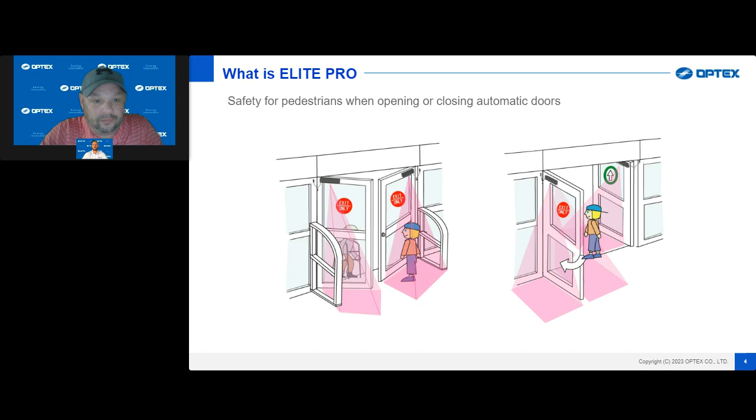The main components of our new Elite Pro series. We're going to do a little comparison here from our old Elite T series that had the door loop, which was our problem child, to say the least. We've listened and we took out the door loop. Now, just to emphasize, there is still a power transfer cable, so it's not wireless, but we have eliminated the position sensor, or what we call the door loop.

Before, in the old Elite T, you had two controllers. If you had a dual door system, single control for a single door system. With the new Elite Pro, there's only going to be one controller that can do the dual doors or single doors or even the LE, low energy models. Again, we have eliminated the door loop, but there is still a power transfer wire that will need to be put in place.

The position sensor, or the old door loop on the Elite T - the new system has a built-in position sensor in the sensor head itself, so that's how we can learn the positions of the doors. As you can see on the diagrams here, I have some red boxes put up, that's just explaining the old door loop. The 2 controls for a dual door system, all down to 1 control with the new 907 box.

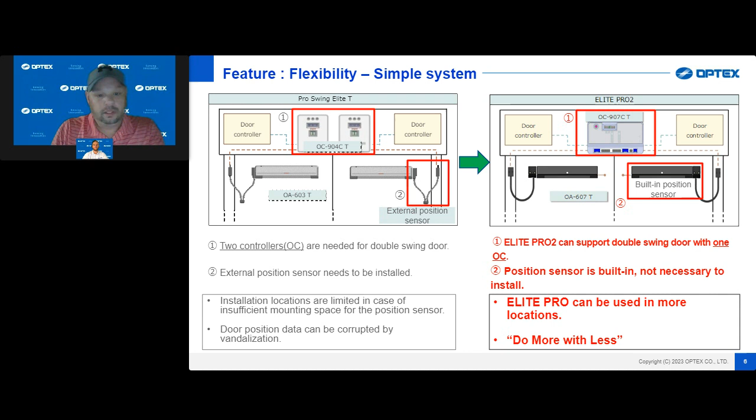Going on, the main components of the Elite Pro: we have our 1 control for the doors, it's the 907 CT, and our sensor heads are now the OA607s. The 907 can control up to 4 sensor heads, so you can do a dual door with 1 control. This helps out with less wiring, less everything. It's a lot more tech friendly than our past sensors.

We support all kinds of doors, and our new sensor heads - one of the best things I like is if you have to switch out from an Elite T to an Elite Pro, the mounting patterns and stuff for the new Elite Pro is the same as the Elite T. So there's no new holes to drill, no new anything really. Everything will actually mount up right with any existing Elite T system if you have to replace them.

The concept, this started years and years ago. People, the market was asking for the best swing door system. And in my opinion, OPTEX has now given them the best swing door system at the best cost.

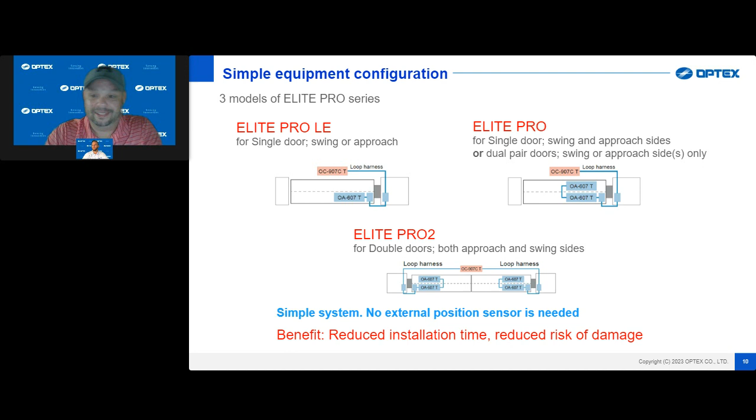The auto configuration. Installation on the old Pro Swing Elite T, you had the installation wiring, you had the setting by dip switches, you had to change a whole bunch of dip switches, you had to pick the side of the door, you had to choose the handing of the door, all via dip switches.

On our new Elite Pro series, it does all that for you. It's very technician friendly. It'll learn what handing the door is. It'll learn what side the sensor is on. So all you have to do is, once everything's wired up and ready to learn, hit the function switch, wait till the LED blinks yellow, step back and let it do its thing. So it's literally a one button setup.

If there are errors or anything, then you can always go through and deal with the Wi-Fi, which we'll cover here in just a few minutes.

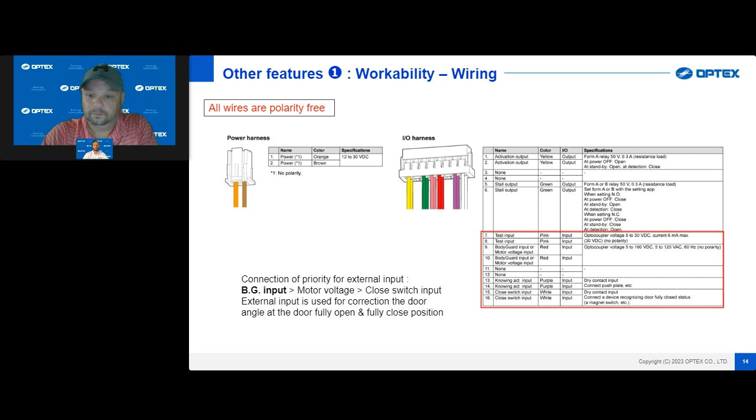I'm going to turn it over here to Tyler at this time, and he's going to actually go over the Wi-Fi and stuff like that. So, Tyler. Thank you, John.

All right, so on the new Elite Pro, this is, I think, one of the most new innovative aspects of this new sensor system. The controller is capable of creating a Wi-Fi signal, and it's not Wi-Fi like you would think of at your house where it's broadcasting internet. It more works like a local network. So you turn on the Wi-Fi on the 907 controller.

With any smart device, whether it's an iPhone, an Android, a tablet, you would open up your settings and you actually go into your Wi-Fi settings and find the Elite Pro controller. It pops up Elite Pro with the serial number. Once you do that, you log into it. They are password protected, so there's a default password, 8 digits to get logged on. Once you do get logged in, it asks you to change the password, so you have a specific password.

We've all seen facilities guys or maintenance guys who get brave and decide that they're going to work on the automatic doors, and usually they do more harm than good. So we went ahead and password protected all the fine-tune adjustments for the Elite Pro. We've been getting a lot of questions about if you came up on an Elite Pro system but didn't set the password, so how do you get in? There is a back door. There's a little process. You push and hold the button and do a couple things, which we can describe in detail, to reset the password back to default. So if you're a tech, you're going to know what that default password is, and you'd be able to get into it and then make your own password.

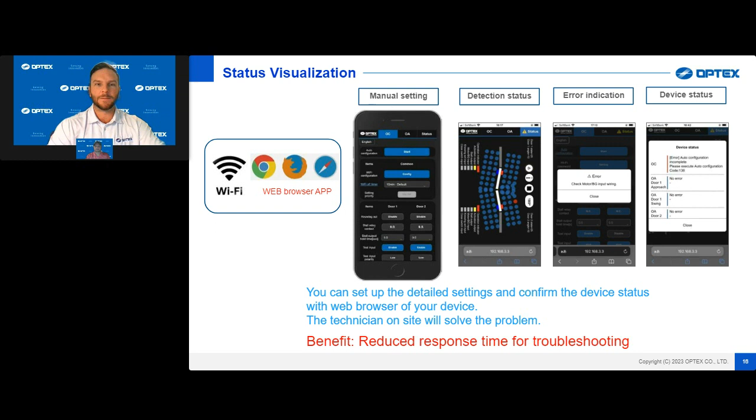Just a couple weeks ago I did operating room pair doors with the small panel, the offset pair - the small panel was like 24 inches or so, and the larger panel was about 48. I put these on and they learned first time, no issues. I had to shrink the zone a little bit on the short panel because it is so small, but the sensors learn all of this while they go through their setup.

You don't flip dip switches. You don't tell it that it's a right-hand approach or a left-hand swing. You put the sensors up and they figure it out by themselves. So there's no handing - if you carry 2 of these around on your truck, you can use them for a left, a right, an approach, a swing. It doesn't matter to the Elite Pro system.

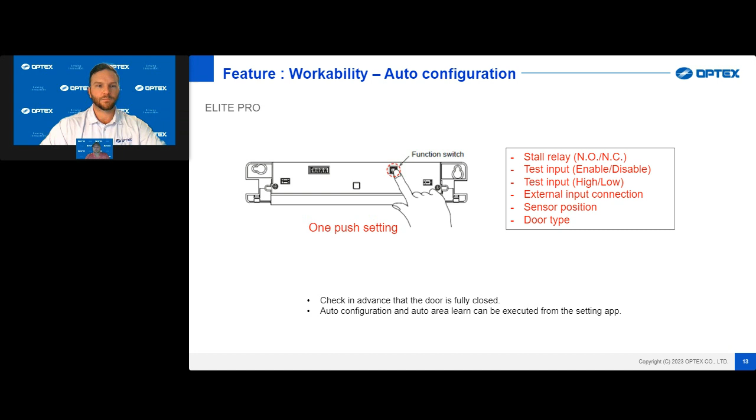We also created a new manual from the previous Pro Swing Elite T. This manual is a really nice book. It's labeled really clearly, not all folded up small in a box with small letters. It's easy to find what you're looking for, everything is split up, and there's plenty of pictures so you know what to do and where. We're proud of this manual, especially since it's a big upgrade from the previous one.

While we're talking about that, say you're in the manual but you can't find what you're looking for, or it's just not making sense to you. One thing we pride ourselves on here at OPTEX is our tech support. John is one of our tech support reps, and our other is Perry Watkins. If you go to our website and look at our sales map, you will find John and Perry's cell phone numbers. They may not appreciate that all the time, but if you've ever been in the field as a door guy with a store manager looking at you, trying to figure out how to get the door back up and running, you understand why that matters.

So we do not have an 800 number to call. You're never going to call OPTEX and get a message like leave us a voicemail and we'll call you back for tech support. You call Perry or John's cell phone directly. If Perry or John are on the phone, they are excellent at dropping a text back saying, hey, I'm helping out another tech, give me 5 minutes and I'll call you right back.

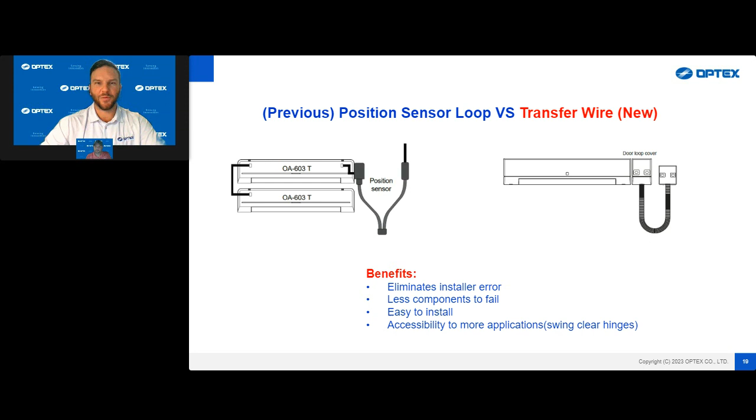John, we got you back. Sorry about that, everybody, I'm having internet issues, I apologize. Tyler, I caught in there, good job taking up where I dropped off. Right when you started that previous slide, your screen went blank, but I covered it. So if you'd like, John, I'll pass it back to you.

You can talk about the door styles we've been testing that are still successfully running. Applications tested in the field, and all these are still out in the field running good today. Not going to lie, during our beta testing, which is the reason for beta testing, we did have a few little issues, some firmware stuff, but that's why we do testing in the field. We were able to clear that stuff up, and from what we know now, everything is working great with all the new updates. Anything you order from us will have all new updates. We're not going to send anything out that had problems, firmware or software. We have tested on dual doors, offset pairs like in an operating room, dual egresses, in-swing or out-swing, single swing doors, swing clear hinges, single and dual. We have them on dual low energy, single low energy, and on doors that have astragal. During testing, we wanted to find problems. We found very minimal problems, and our engineering team was able to correct and move on. So I'm happy to say right now they're great for just about any type of door system.

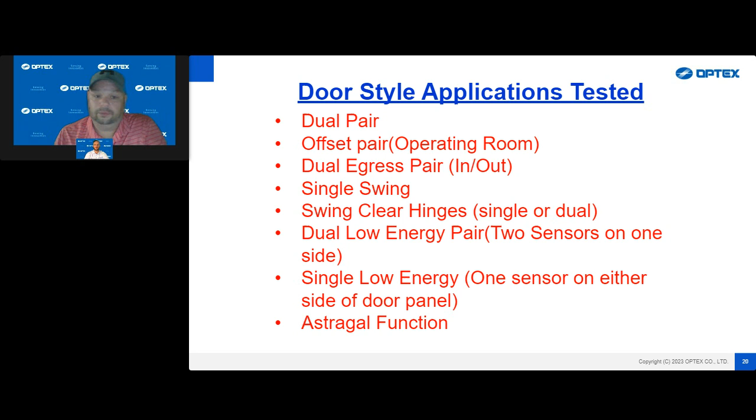Tyler, could you take over and do the slides real quick? I think my internet's freezing again. Yeah, sure, no problem, John.

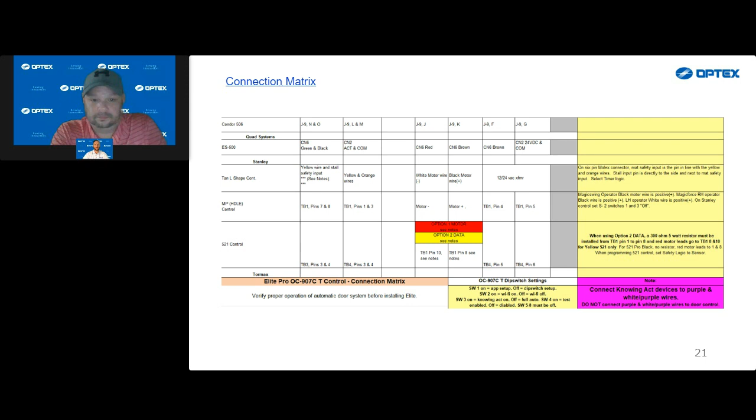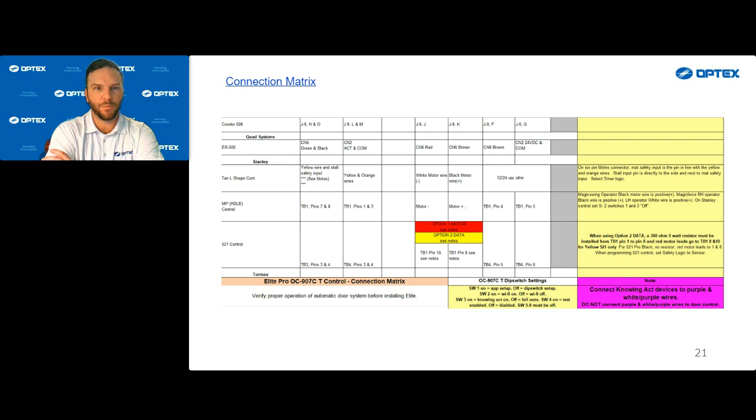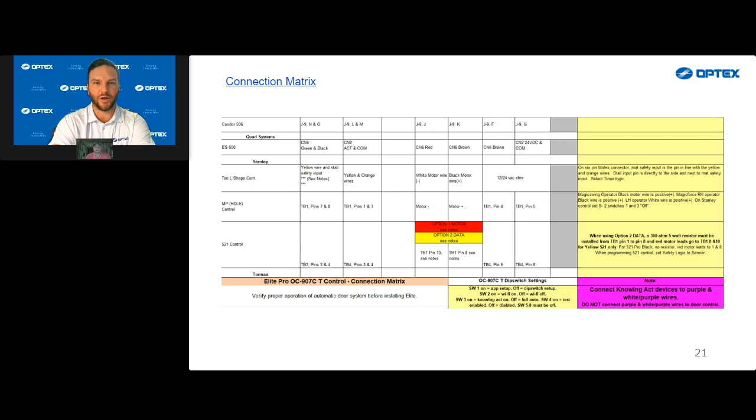Another new tool that we have for everyone is the connection matrix. We had a similar connection matrix on our previous Pro Swing Elite T. This can be downloaded right from our website, you don't need credentials, just log onto optexamerica.com, find the resource center at the top bar, and you can pull this connection matrix. It has been updated for the new Elite Pro. This new updated connection matrix you will see in the downloadable box, looking in the console. You guys can go on right now, download this, hold onto it. This has pretty much every door control that's out there. There's maybe a few smaller OEMs that haven't been finalized yet, but every major OEM, their control is on here, whether it's old or new. So definitely utilize that for your field guys. I used to carry one of those around because you never know what you're going to come up on.

So in summary here, just to cover our bases, the new Elite Pro is a much easier installation, really easy setup. The sensor does most of the heavy lifting, like we said, of learning where the heads are, you don't have to tell them where they are. And maintaining the system has many fewer components that could fail. There's no door position loop. There still is a power transfer wire, but no door position loop. Fewer components to go bad, one control.

Out of all the demos that myself, our team, John, Perry, have installed, we started installing these late in November, December 2022. They are all still up and running. None of us have been back to service any of them. We keep in close contact with the partners we did these demo tests with, once or twice a month. If we don't hear anything, we assume no news is good news, but we call to check in: hey, how is that new pair? And so far, so good, we've had no major issues. They haven't failed, we haven't had to go back to relearn anything. So it's a very resilient, robust sensor system that we're excited about.

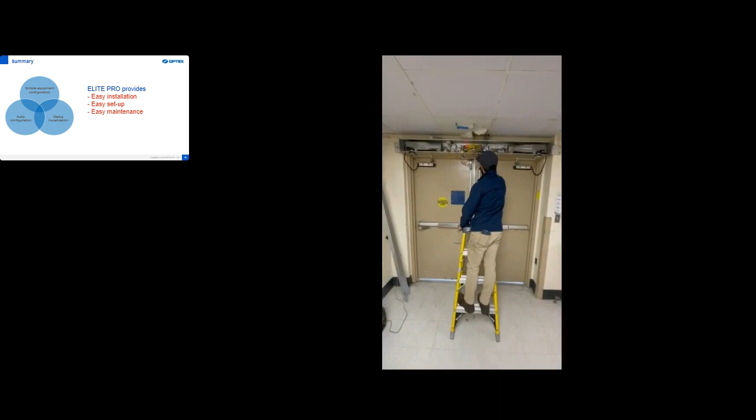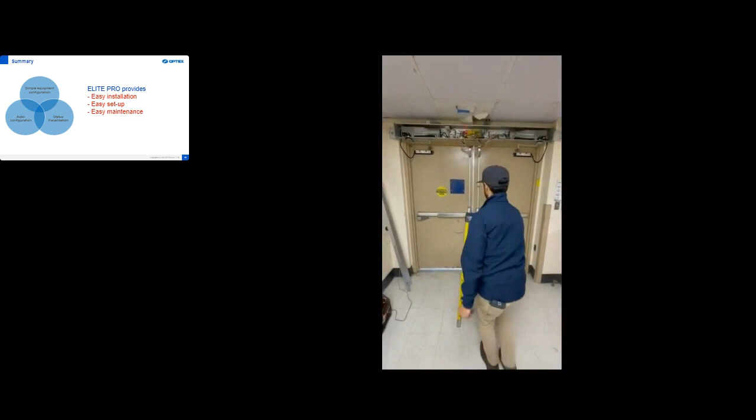So what we're watching here is myself and this technician upgraded Pro Swing Elite T's to Elite Pros. We didn't have to drill any new holes. We removed the old sensors, hung the new ones on the same screws, and sent this door through a learn from the sensor head. You push and hold the button, the doors are going to open and close twice. Once they're done opening and closing twice, they're learned.

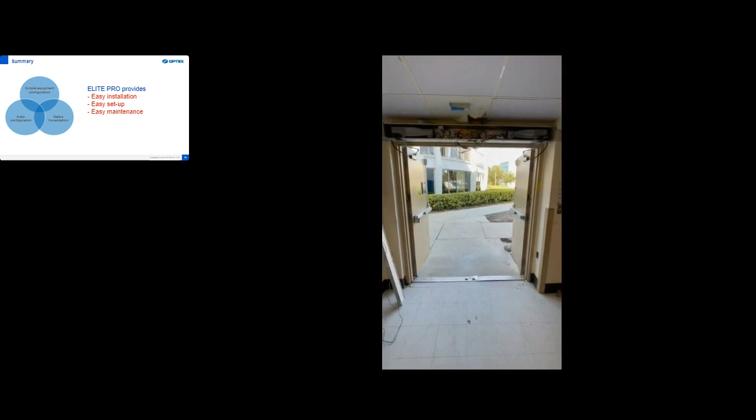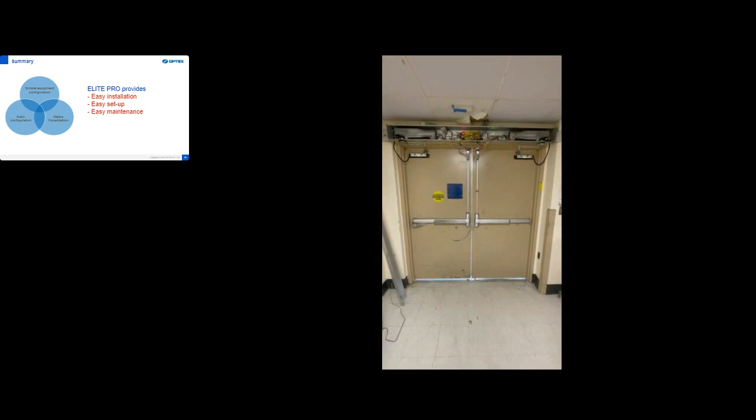See that one is red? I wonder if it's the wall that sticks out right in front of it. Shouldn't matter, I'm saying it should learn it. Yeah, but I wonder if that's why it detected that. It learned. What's the red? The BG input, which that should be.

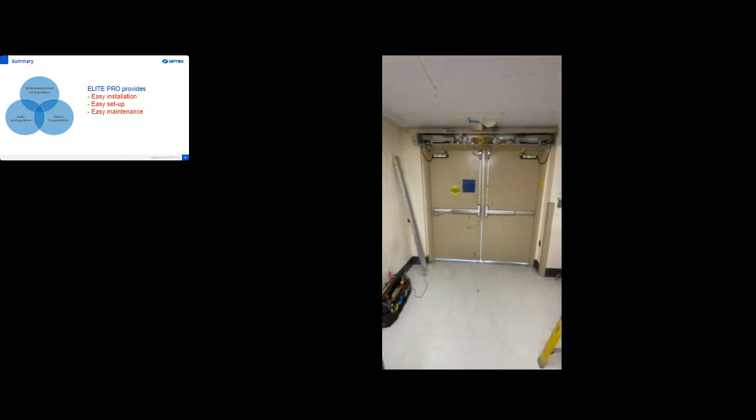So that's what we got. So now I can give, you want to short them out? Well, do you want to?

So that video there, that's just a learn cycle we did. That was installed, I believe, in early January or February, and that door has not had any issues since. It's one of the busier doors at that healthcare facility.

It's actually where they bring out all of the trash and everything that you want to get out of a hospital, so all the laundry. While we were there installing that day, several dozen people went through that set of doors. So it's one of the busier sets. By this time, it has had, I don't know how many, probably thousands of openings.

But like I said, no issues. And the partner we did that with spends a lot of time at that hospital, so every time they're there on a different service call, they go take a look at it. And it's been up and running great for several months.

The next video I'm going to play is the web-based app that I told you about. So here you'll see this is sending the doors through a learn from the application. And this was actually shot in Japan at our headquarters, and these are engineers doing this test. This video, you'll notice, is sped up so we don't run out of time, so the doors aren't really moving that fast.

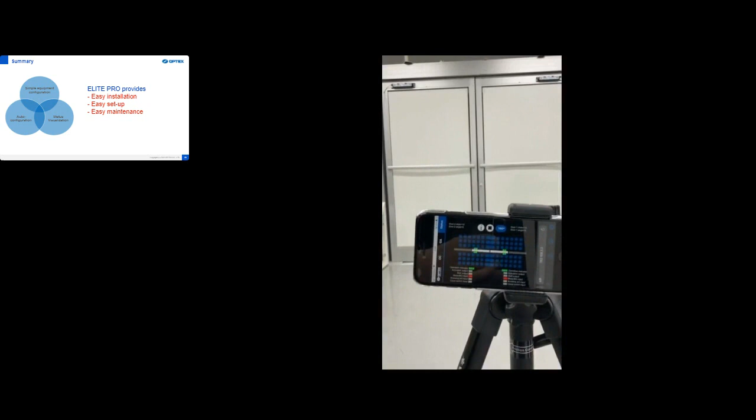So that tells you the learn is complete. And here is the status page that we're very excited about. You'll see the infrared dots turn red as you go through them, and it shows you on your phone what the sensor heads are doing.

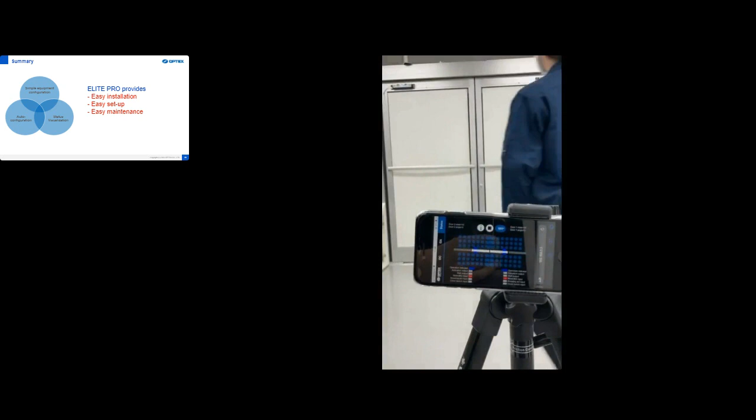Here, knowing act was turned off, that's why the sensors are firing when they approach them. That is adjustable. If you turn knowing act on, the controller's looking for a signal from a wave plate, push plate.

So there's that one. This is a dual egress pair of doors. Once again, this was Pro Swing Elite T's that were upgraded. We removed the Elite T's, we installed Elite Pros. It's a dual egress pair on a 521 Classic. This is also going from a waiting room into, I forget the department, it might have been outpatient surgery, something along those lines.

Very busy door. This has also been running for several months. All right, go ahead. And this is just a dual pair we put up at another hospital.

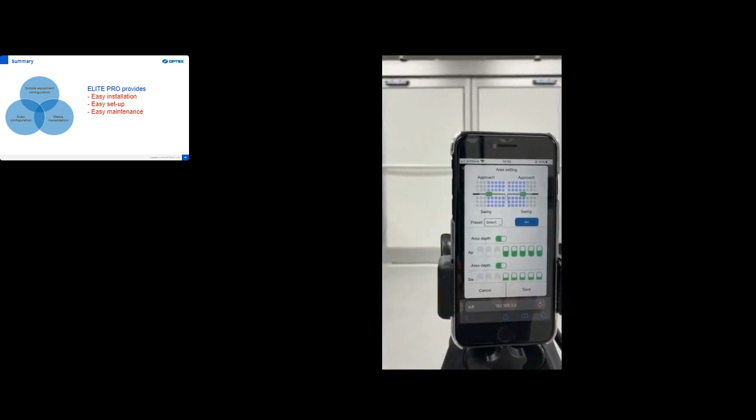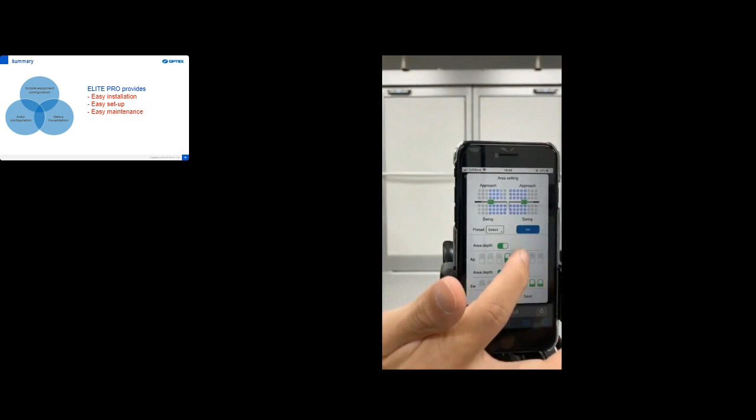And lastly, this video shows adjusting the zones within the browser application. So here you'll see 4 sensor heads, that is the infrared pattern that they are throwing. And the little switches almost look like dip switches, but they're digital dip switches. You'll see the rows are turning off, so you can configure each individual head specific to the zone that you're looking for.

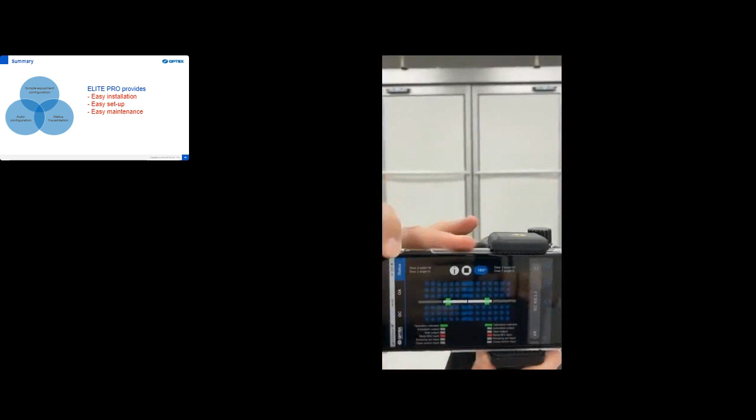If there's a desk or something that's in the way of one of the sensors, you can shrink that zone. And here you'll see they just turned off the zone, so it's not firing. But then when you go to the middle of the doors, that zone is still active, so it fires the doors.

And here they're showing there's 3 rows of infrared. You can shut down the 3rd row. The first 2 rows must stay on.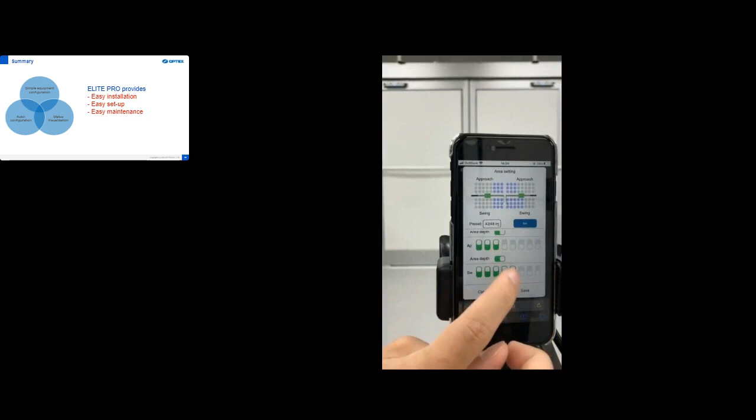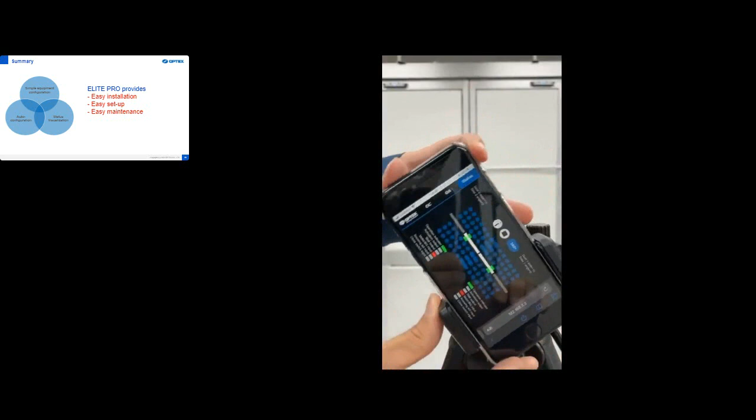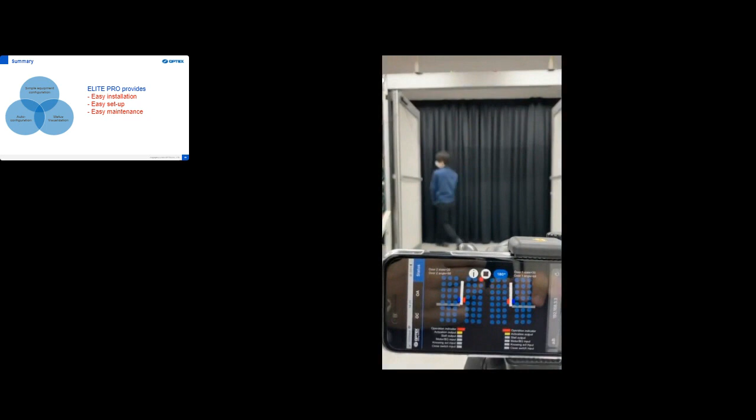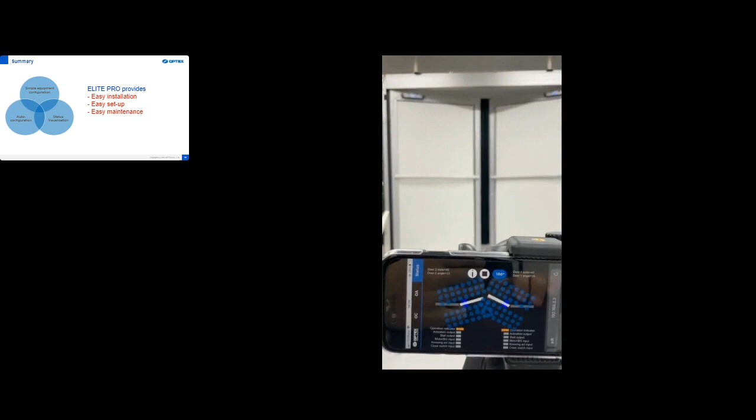You'll also notice, I didn't mention, on this status page near the bottom it shows you the LED lights that are on the controller inside the header. So you can watch and see in real time what LED lights are getting fired off without having to open the header, try to get up on a ladder and look to see what's happening. You just look at it from your phone on the ground. So say you had a motor voltage issue or something's going on, those LED lights are going to tell you there's an error, you need to adjust the wiring, programming.

So that's the web-based app, so you guys could see it. And we got some time here, so let's kick off the Q&A.